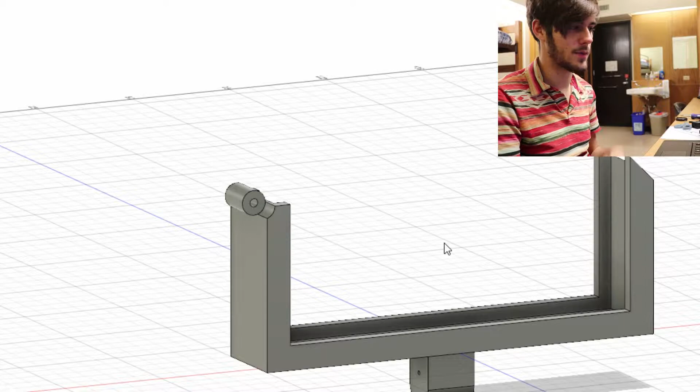Okay, I just finished up the CAD. I have not put them together quite yet, but this piece right here is what I'm referring to as the top part of the enclosure, which is just this section right here.

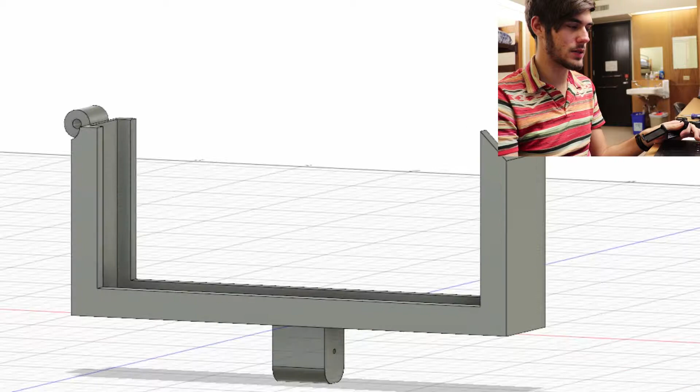You'll probably notice some differences, like how right here there's a slant, and I'll explain that when I show the top part or the bottom part. Down here is where it will fit onto the dampening piece of equipment — it'll fit right in between here. There's little holes for the two screws on each side.

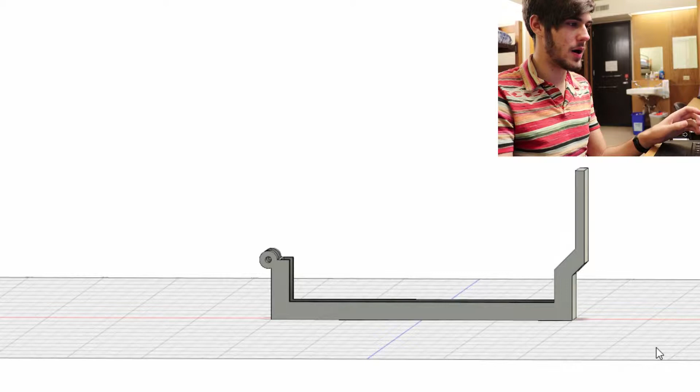The only thing different now is on the bottom enclosure. So instead of modeling out a latch like how this has, I decided to just put this flat piece right here, and I'm going to put a piece of Velcro on, so that way I'll be able to take it on and off. And if that's not enough, I can always drill a hole and just lock it down.

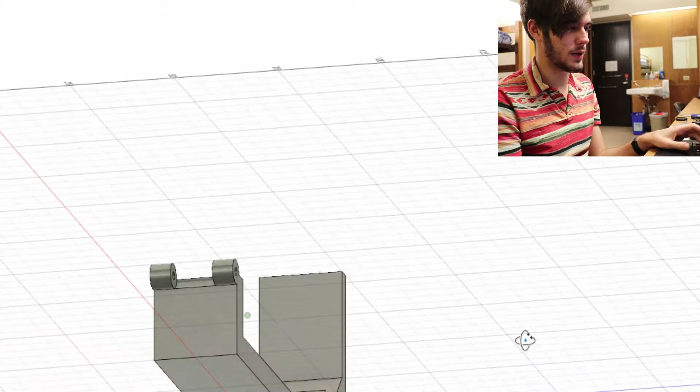Here is the final design. I forgot to add a little hole at the bottom of this so I could turn it on. I am going to have to put the camera in upside down just because where the button is to turn it on is too close to this, so I thought I would just turn the camera upside down and fix it in post.

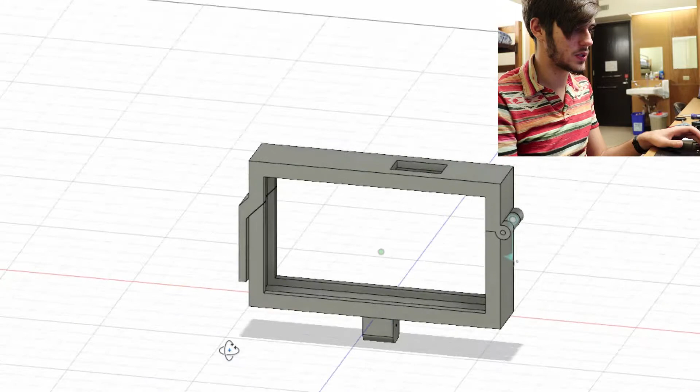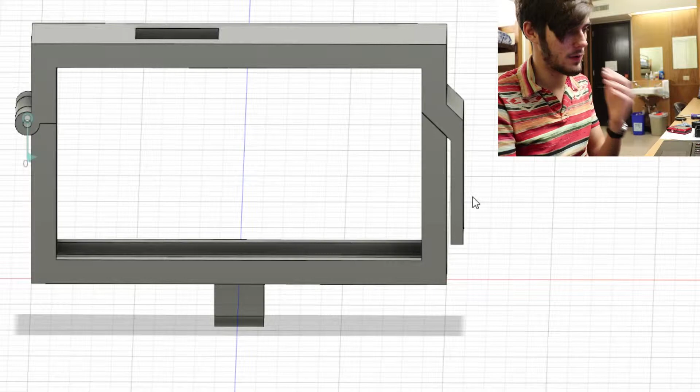But here's the final model. I'm gonna just go through one last time and make sure all my measurements are correct and probably clean up some of these edges to make it a little nicer, just bevel them and stuff. You can see it will just snap right here, and in between here there will be some Velcro to help keep it down. If anything, I can also keep a rubber band here to keep this piece close to this piece.

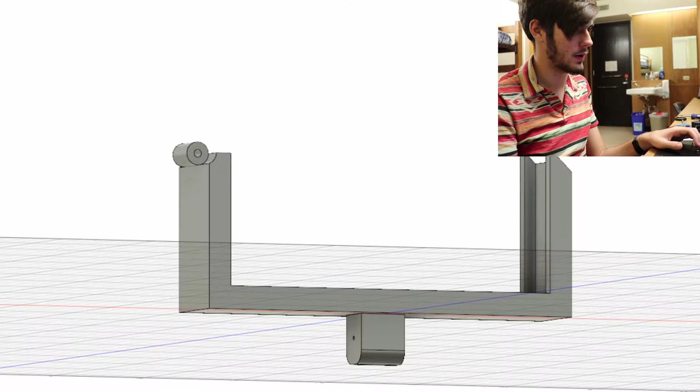But I mean, here it is. Hopefully this works the first time, so I don't have to do any more major adjustments, but I'll go through and double check my measurements, make sure everything's okay, and then I'll print out these two separate pieces tomorrow.

So here's the finished project. There's some issues with this model, but I went ahead and just printed it out. Mainly when I was messing around with this, I actually broke this piece off, so I just slapped some super glue on there and some tape, and it'll be fine for what I'm doing with it.

Also, I underestimated the size of the holes. I'm probably going to end up redoing this model, and I'll probably fix this issue. Printing it a different direction will help.

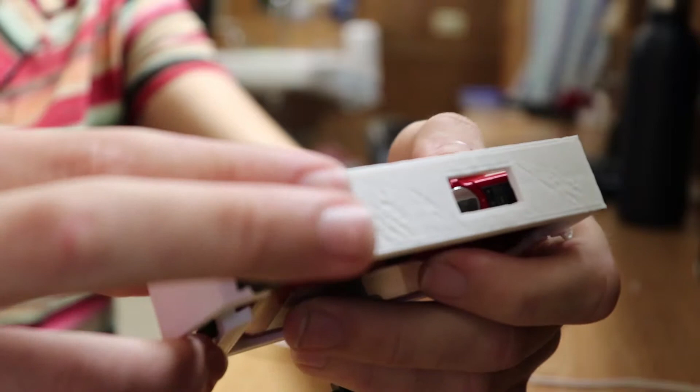And the same thing happened down here. I underestimated the size of the hole at the bottom, so I actually stripped the hole. So I just have this here to help keep it on there if I need to change the direction. But other than that, it should be fine mostly.

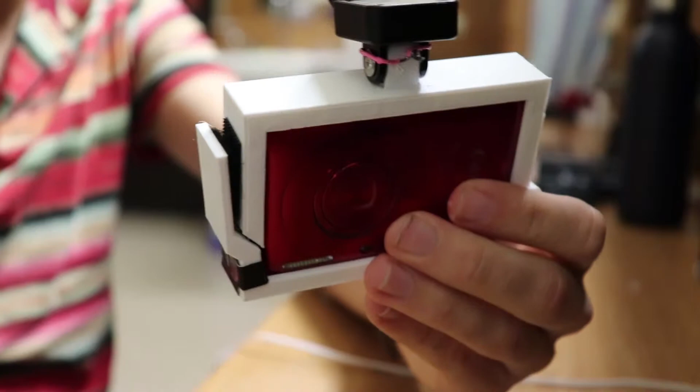For what I need it for this weekend, I think this will work because this will just hang like this and doesn't want to move, and for the most part the camera's in here fairly well. It moves around a little bit, that's okay. Turn it on, it's still pretty easy, just like that, and it will sit on the drone like this.

Okay, so it's still raining, so I'm just inside of my parking garage right now, up a few floors. Gonna hook up the camera to the drone and just try to fly it right here in this space, so we'll see how that goes.

So I ran into my first error, and I didn't account for how low this would sit. So when this sits on the ground, it actually hits right here. So I've just kind of adjusted the camera back to give it more of an angle down versus across. That's okay, I'm fine with that, honestly.

And the second issue is that right here where the Velcro is, there's a lot of play, and I'm not sure if I'm okay with that. So I might just stick a piece of tape right here as a precautionary measure, and maybe in a later model I can go through and fix that.

Alright, so let's do it.